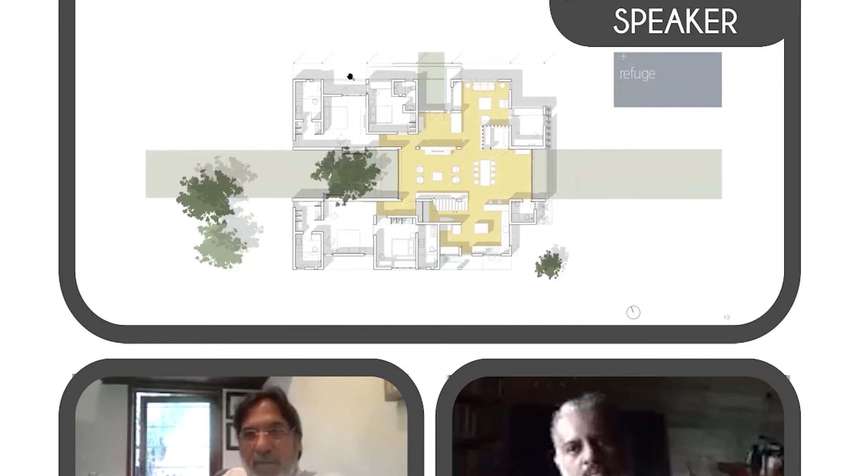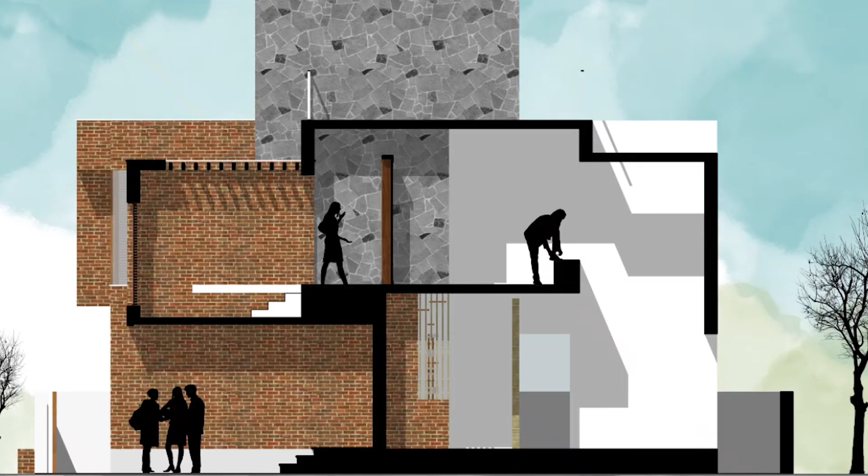Talented young designers and design studios working on design innovation with an approach that is relevant to our South Asian region have been invited to be a part of the platform. We also encourage design students from the region to share their work, be involved in the dialogue, and to be an active part of Design United.

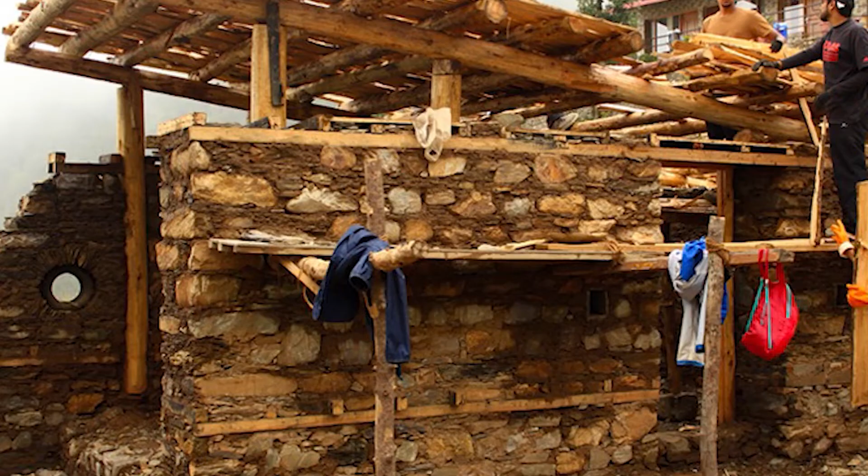Design United, most of all, believes in creating a community of designers and design knowledge that is largely contextual, with focus on contributing to the environment and our community. Design United believes greatly in a spirit of collaboration and idea exchange.

Welcome once again to Design United's 41st Design Conversation, a conversation with two talented design firms from the subcontinent, Malisha Koditavaku from Colombo, Sri Lanka, and Solachi Ramanathan and Ajay Dev from Urban Workshop, Chennai, India. I'm Varna Shashidhar, founder principal of a regional landscape practice, VSLA, based in Bengaluru.

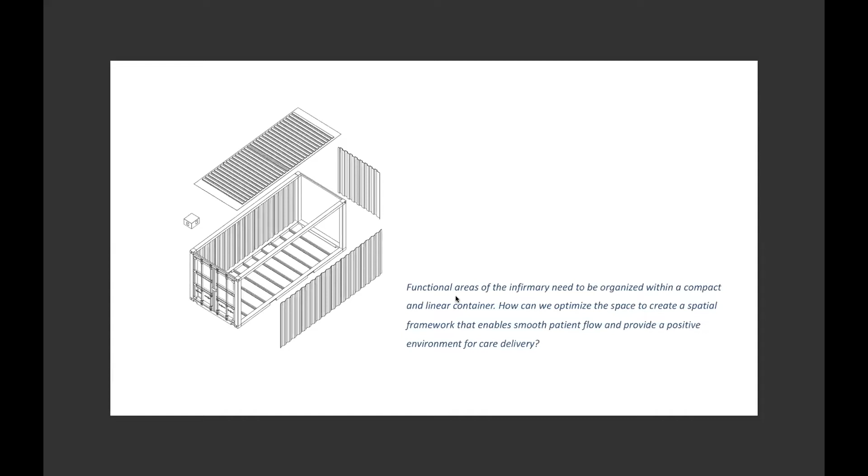So we stayed with the module size because it was easy to transport, and we looked at how we can organize the multiple functions within the proportion of that space. So we created this wall, a deep wall, which would manifest in the form of niches, openings, storage. And this was along the longer edge of the container, which contained the primary functions of diagnostics and treatment, a nurse station, and the monitoring of the patient.

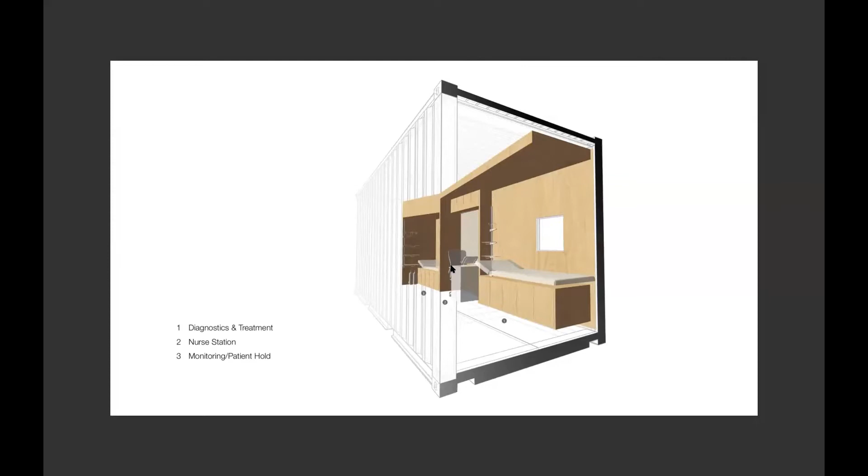And we decided to use wood, plywood, because it was a friendly material that one is more familiar with. And of course, the container being made of metal, thermal comfort was going to be an issue. So we provided a secondary roof to reduce the direct solar radiation, along with insulation along the walls.

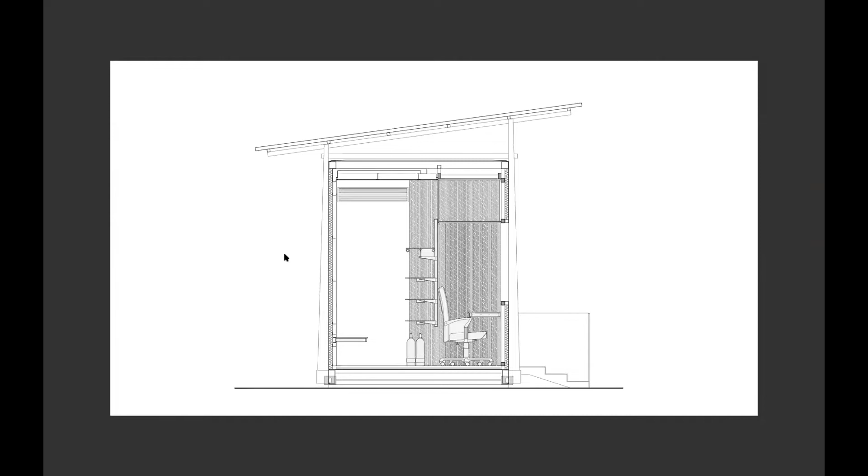And the plan basically consists of this wall on one side, and on the other long side, we have the waiting area and registration. So the central area is free for circulation. And the other elements like the ramp and staircase had to be installed on site.

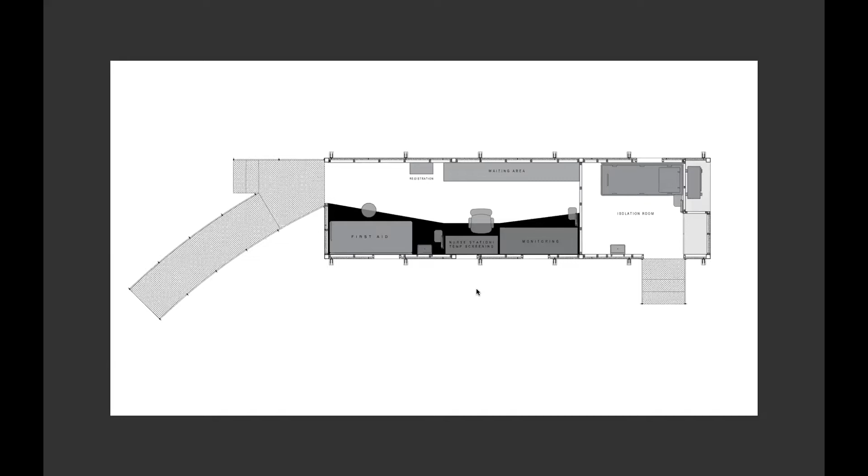So since we were not using a shipping container as it is, this opened up the possibility of rethinking the material expression, the external expression. So instead of using a trapezoidal sheet, we chose to use a flat galvanized sheet, and use the structure of the secondary roof as part of the expression of the container. So the container itself would be completely fabricated with the interior. The ramp would then be assembled on site.

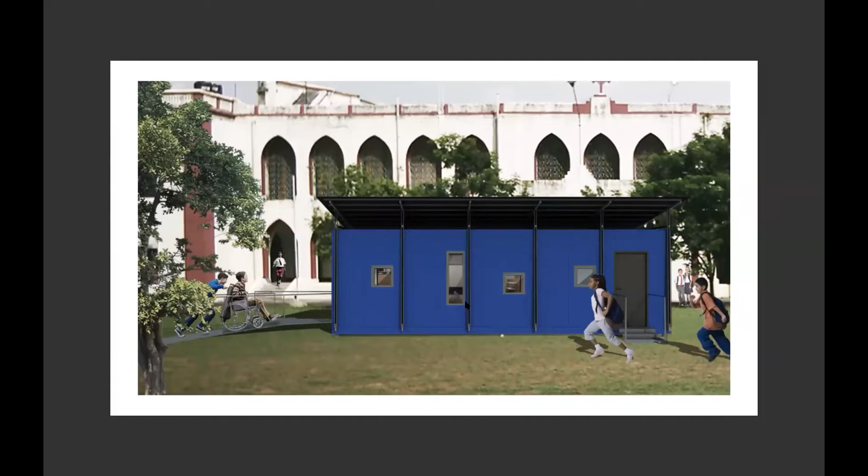So that brings us to the second project, which is a vacation home in Coonoor. When we went to the site, it's a valley view, and you can see Mettupalayam actually in one corner. We knew when we saw the site that we had to do very little with the building itself, and so we wanted the building to be harmonious with the context.

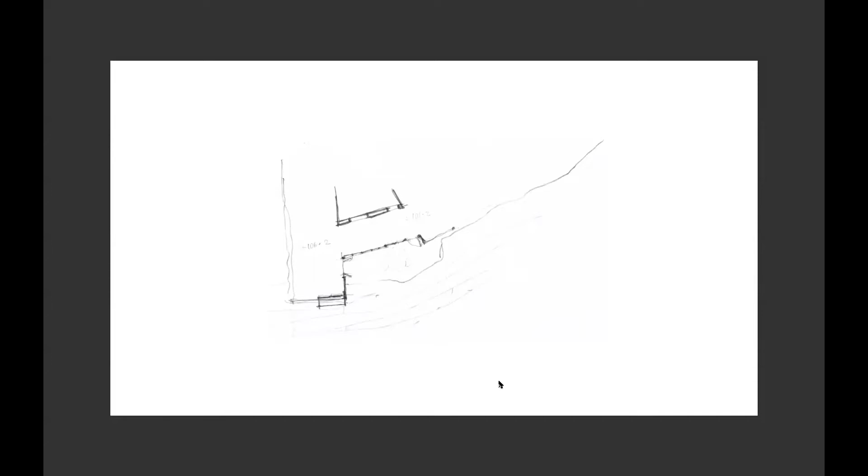So it consisted of two blocks, and the manner in which the two blocks were joined was inspired by the shape of the contour. So the building gently turns at angles, facing different parts of the view. And the facade of the building is open with the windows to the view opposite.

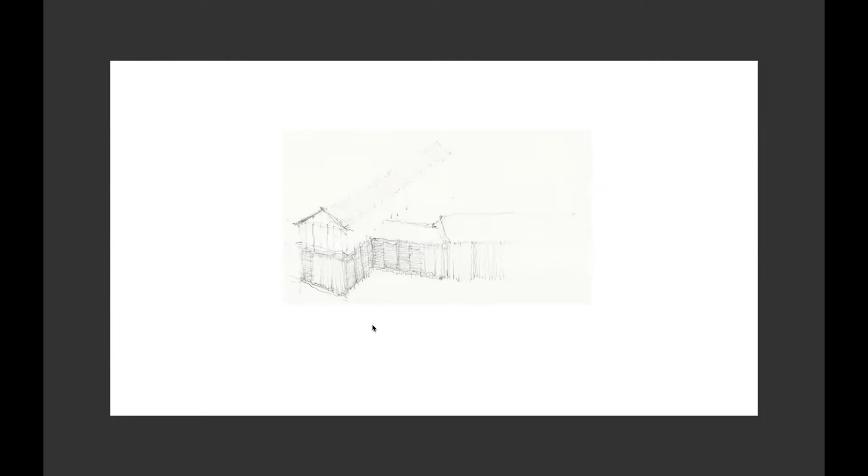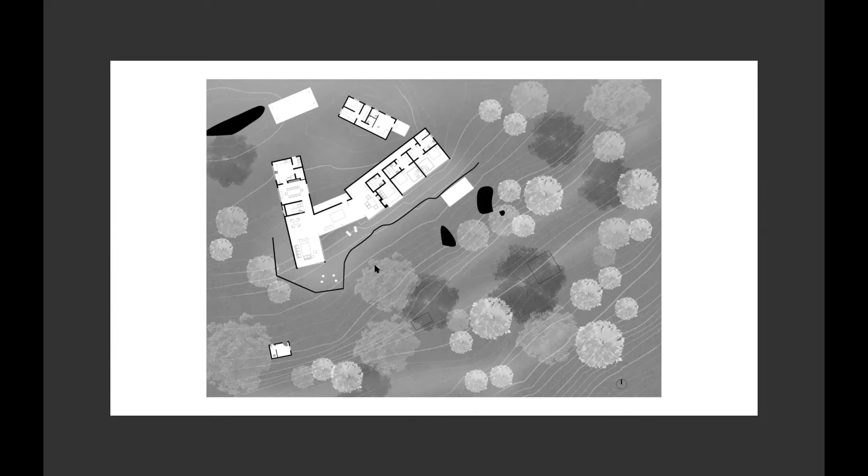So as a result of this geometry, the central space becomes the collective or common areas: the living, dining, the fireplace. And the bedrooms are at the ends of the circulation, on the ground floor and on the first floor. And this collective space has a very fluid, organic character. So you don't really feel like you're moving from one space to the other, but there's still some separation. These are some of the photographs.

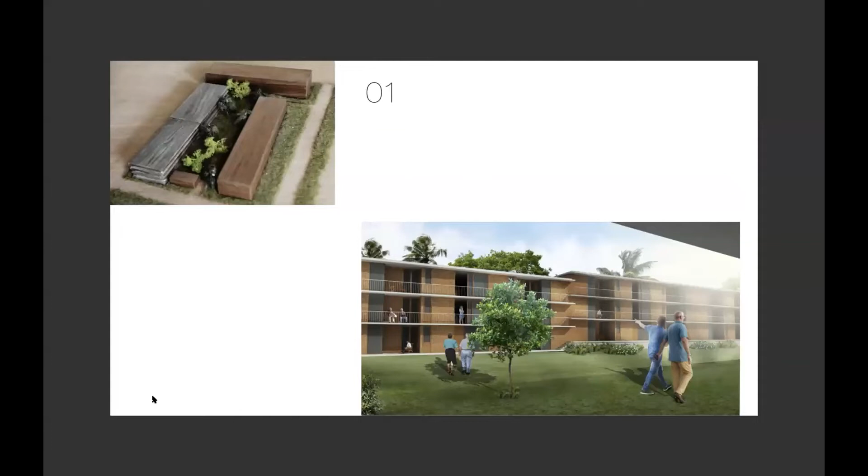The design process was quite long. We went through 3 schemes in an evolutionary manner, and we'll share a little bit about each scheme, because I think each scheme was very revealing, and the learnings were a lot. So the other requirement that they had was that it had to be 3 blocks, because they wanted to build 2 in the beginning, arranging the blocks with a big garden in the middle. It was fairly simple. So linear blocks with a garden in the middle. And the scale of the blocks was very important, so that there was sufficient light coming into the garden for plants to grow. So it had to be low, only about 3 floors high.

Now we could not take this scheme forward. The primary reason was that the 2 longer blocks were facing east and west, and that would mean that it would be pretty hot, especially outside of Chennai. And because of the scale, we were also not able to achieve the required area to be built.

So then we modified this a little bit, and we tried to bend the blocks a little bit so that they become self-shading in a way. Since the blocks now became larger, the passage in the middle became just a green corridor. So we wanted to provide more space for communal activity, for people to informally engage. So we created a large veranda in front of the apartments on every floor, a space where people could informally gather. And this again was an issue, because while we thought it was important for them to have this space, the clients felt it would be difficult to sell it. Ultimately, their personal space became smaller.

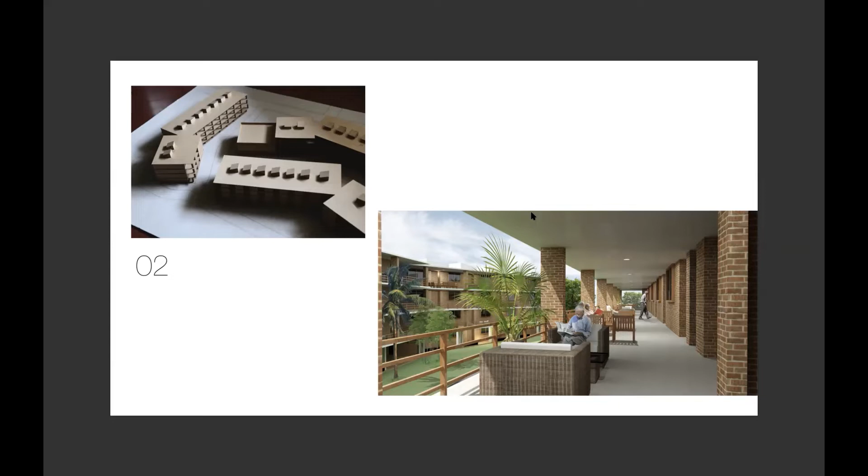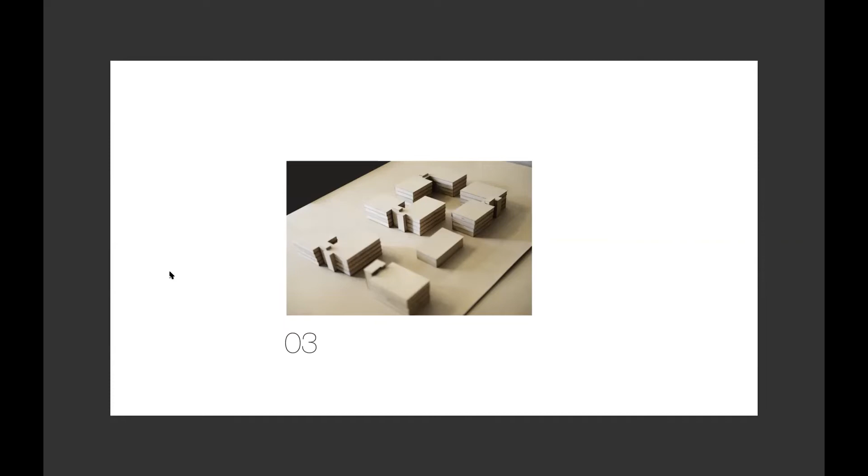So then finally we said, okay, we've tried everything with 3 blocks. Maybe we need to reconsider that. And then we decided to try a cluster option, where we had a larger number of blocks clustered around smaller courtyards. And so this led us to the final scheme, where we had 5 blocks to be built in 2 phases, more or less similar, with smaller garden spaces in between them.

And the unit itself, there were 1 and 2 bedroom units, and they were all organized around this covered balcony space. And there was a large common continuous balcony which connected all the rooms. And we thought that the housing did not require kitchens and it could be more open, but there again we were wrong. It seemed like what people desired was an apartment with a kitchen.

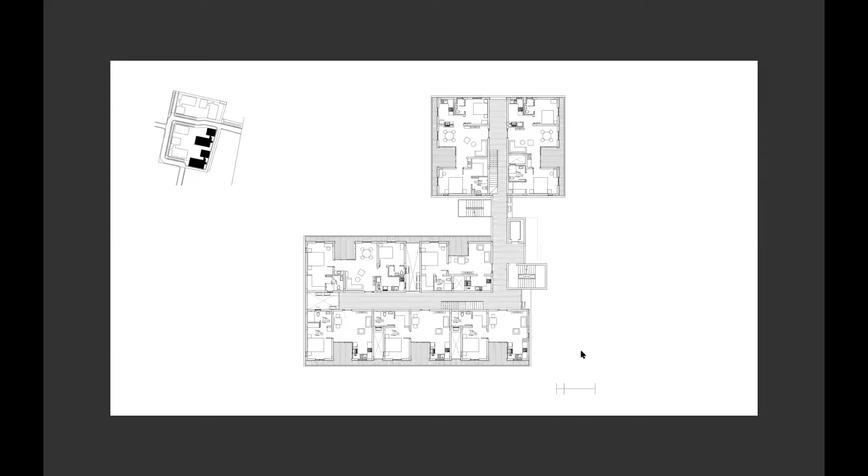In this scheme, we struggled quite a bit in the architectural expression, because it was a medium rise building, which was neither low rise nor high rise. So what we tried was to create a variation in the expression of the balconies. On the upper floor, continuous balconies which were open to sky, and then on the lower floors, wherever we created large plant.

The spaces in the common, the community center. Learning from this, I come back after my master's in housing and urbanism, and I've been exposed to many different typologies of housing, and many interesting ones. But I think the big learning from this was that it is very closely connected to the nature in which it is provided, who provides them, whether it's government or private, whether it's rented, for lease or for ownership.

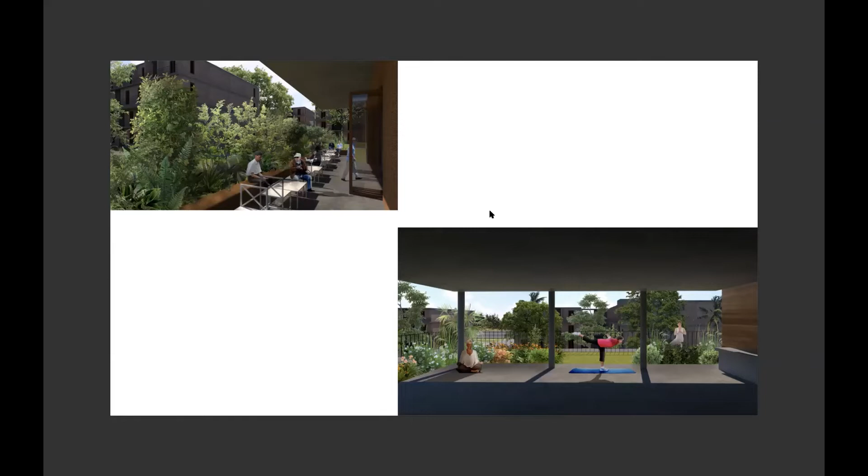So with that, we'll go to the last project. Yeah, Samudra. Scroll up when you need to. Scroll up.

Samudra is another residential project in Chennai ECR, which is in closer proximity to the coastline. The area is about an acre of land, and there was an existing building. The requirement from the client was to retain the existing trees and to allow more light and ventilation inside. So we made the plan with rooms in juxtaposition, without many corridors, and it's open towards the garden around. It has multiple entries, so you can step down to the garden from most of the places like the living room, master bedroom, dining, as well as the library.

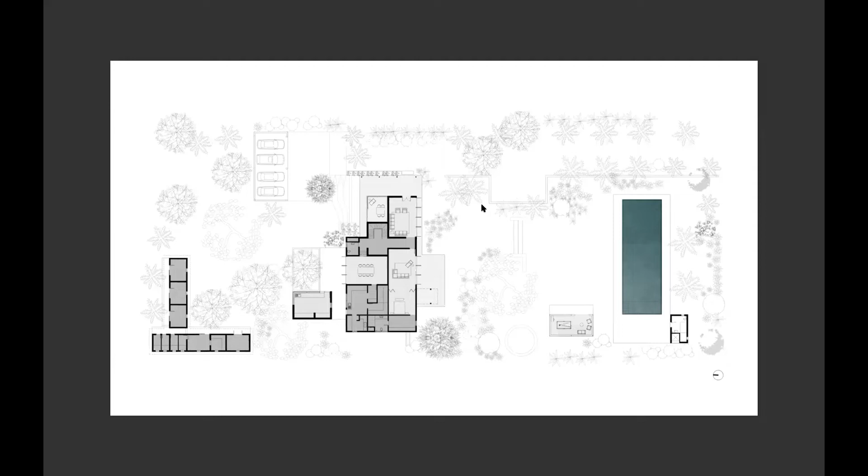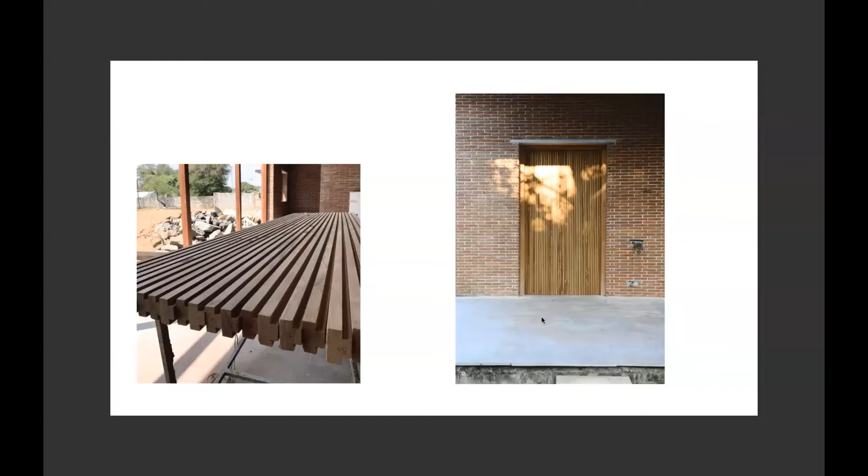The time we spent on the detailing was very helpful when we were at site executing the work. The amount of time spent at the desk on detailing really helps with the ease of execution. That brings us to the end of our presentation.

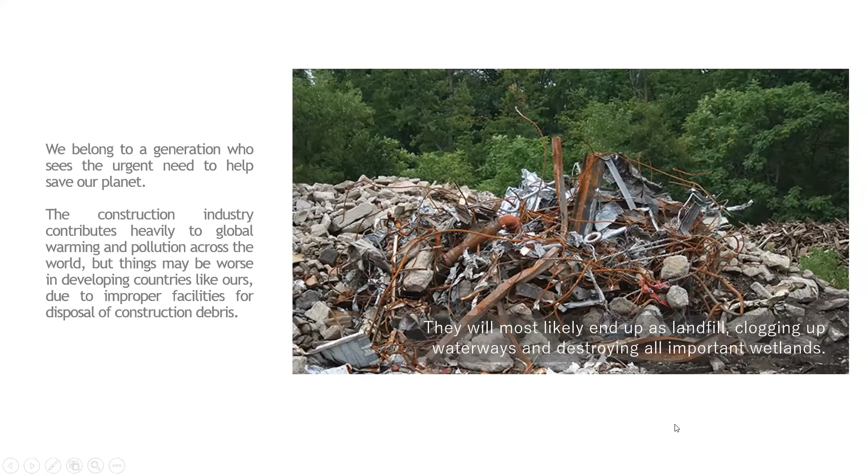So I think it's time that we look at recyclable materials and look at things that have been recycled or reused. It's not a new concept, but as the generation we belong to, we understand that there is an urgent need to think about these things. So what really is responsible design? As architects, we are also artists in a sense, but we have a lot more responsibility because it's a functional form of art, and we have a huge responsibility to the people who use our buildings, how they feel inside them, because our environments affect how we feel. It can make you happy or angry or depressed, so there's a lot of factors at play, and we have to really think about all of those things when we design.

So when you go beyond aesthetics, as designers there are certain questions we need to ask ourselves with every step of a project. Would this space induce happiness every day? Would somebody be able to seamlessly go about their day, or is my building going to obstruct their routine? Is it a maintenance nightmare? Where did this material come from, and what will happen to it at the end of its lifespan? A really important question: is this necessary in terms of space or materials? And can this be done more efficiently? These are questions I think we need to keep asking ourselves.

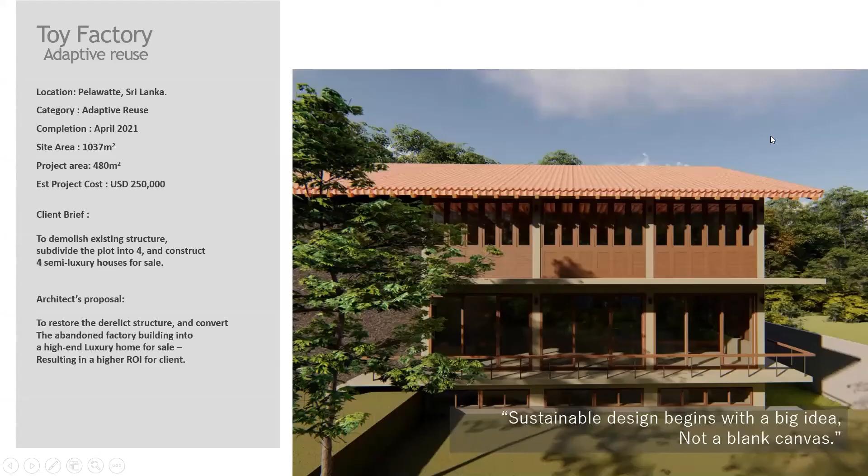I'll run you through two projects. I've been fortunate enough to have clients who've been very open to suggestion and to doing something slightly crazy, whereas not everyone would be willing to take a chance with their investment. So I'll run you through two projects as to how I approached design. The first one, this is the first time anyone's seeing this because it's still under construction, and it's going to be completed sometime next month. This is a 3D rendering of what it would end up looking like.

Basically the client came to me with a plot of land. It was 40 perches, or just over 1,000 square meters. There was a useless building on it, and he invested in it for land value. It was going to be divided into 4, and he came to me with the option of putting up 4 semi-luxury houses for sale. So it was entirely an investment project from his point of view. I gave him a counter proposal: what if we restore this building? Because I really didn't want to bring it down. It was a 5,000 square foot building. I didn't want it ending up in a marsh somewhere.

So I suggested, why don't we try and redo this and market it to a higher end, like a luxury home. And that actually resulted in a higher ROI for the client, because his investment was smaller and his return will be higher ultimately. It is a slightly bigger budget project, about $250,000 US. I'll run you through what we did. This was the state of the building. I think even the guy who sold the land didn't value it at anything because it was considered worthless. And it was in quite a bad state.

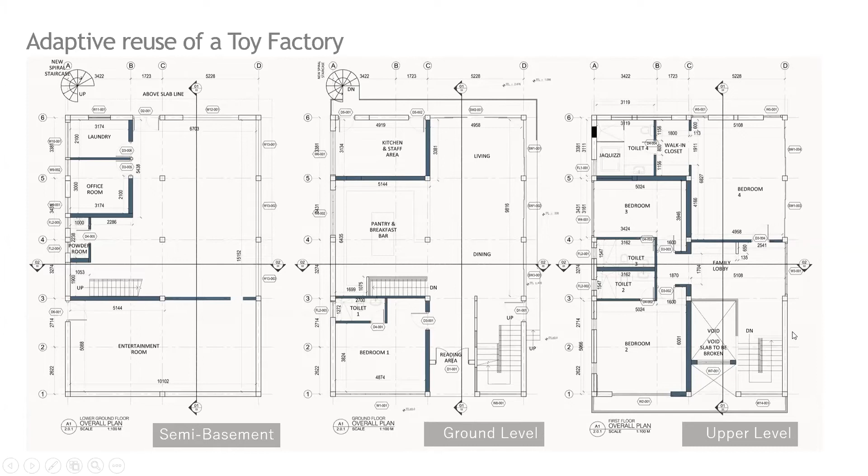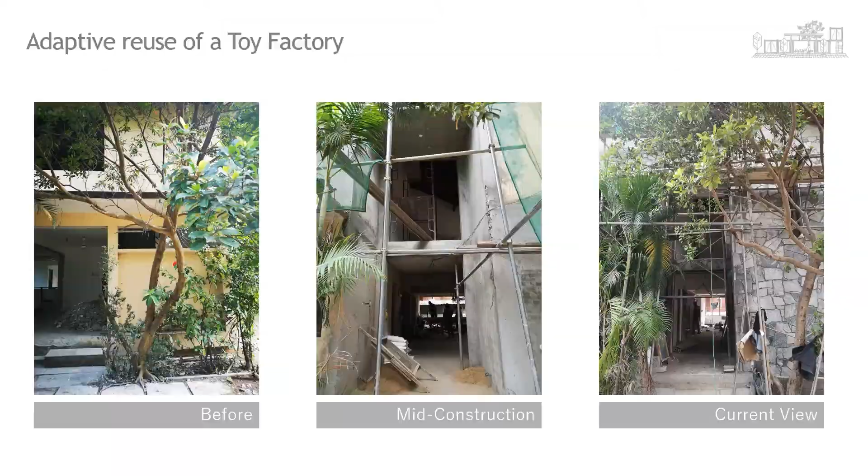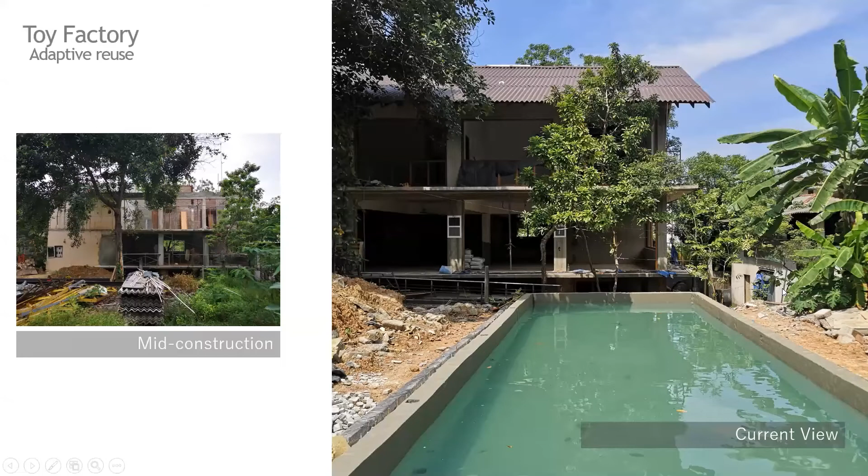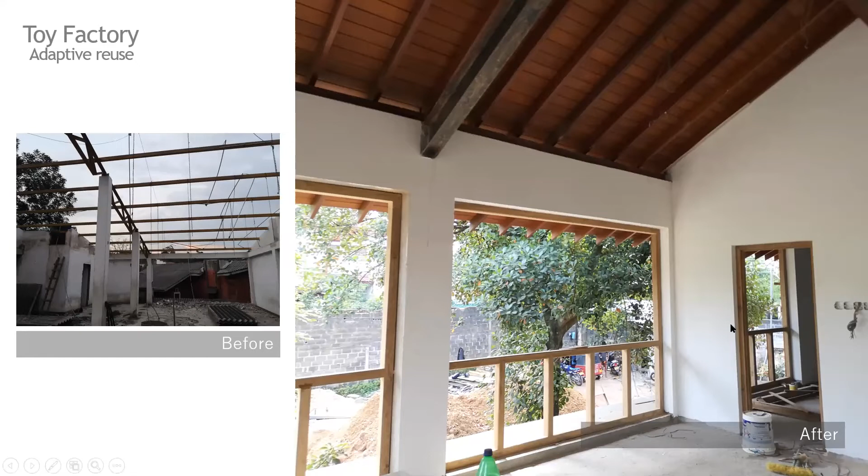I think the left photo is when we had taken the roof off. The roof was the only element that we had to completely replace because it wasn't suitable for a home. But we did reuse the steel that was on the roof. I think you see it here on the photo on the left. So all the steel purlins were restored and finished and reused for the garage, and we did an outdoor parking space, and they were reused for that.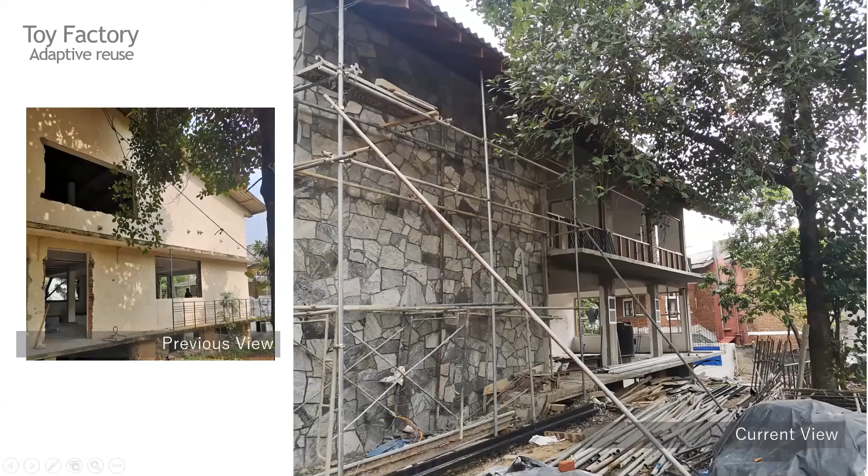So the roof was done afresh, but it looks much more like a home than the picture on the left, which again is the same space. So that's the same view that you're looking at. You see the same jack tree in the view. So the left would be the building when we had just started working on it, and as it is currently is the view on the right.

Yeah, so back to this, and this is what we're hoping for the end. The windows and doors are all done, and they're due to be fitted next week. So this would be the end look of the building, and we're hoping that it would make a great home, and that it didn't go to waste.

And the next one that I would like to present to you is the Box House, and that is a container conversion. It's a 5-bedroom villa, 5 bedrooms and 5 bathrooms, but it's only 230 square meters. That's about 2,500 square feet in total. The villa itself is only 2,080 square feet, and I think the biggest thing to learn from this was that by being restricted by the containers and the volumes themselves, we actually managed to fit a lot more into a little space.

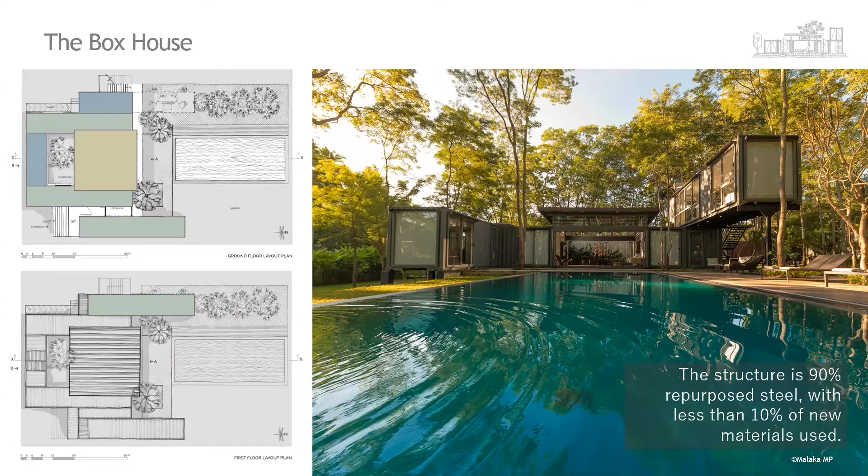So on the left, that's how the containers are configured. The space in the middle was fabricated. It's a space between the containers, and we roofed it separately to give it a different volume from the rest of the space. And the structure is almost entirely repurposed steel. So it's about 90% reused and only about 10% new materials, which was for the roof of that middle section. So that's what the inside of a shipping container looks like.

It's very basic, and I think Urban Workshop would also appreciate the amount of detailing that you have to do, and it's different to what we usually do. So it's a lot of detailing and learning on the go.

Unfortunately, with our project, it was so complex. The connections were so complex that we couldn't do a lot of fabrication at the factory, and we had to do a lot of it on site. So at this stage, we moved it to the site next. So as you can see, sometimes it doesn't always go to plan. Our crane broke and they dropped one of the containers while trying to place it.

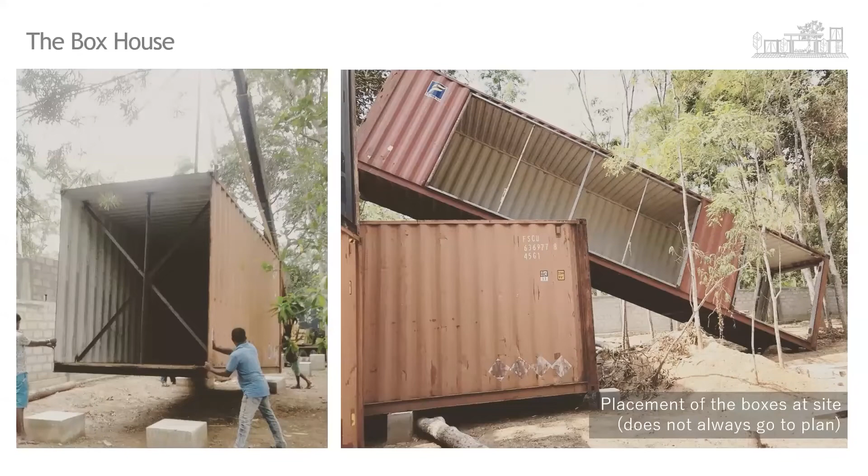It's a bit of a process because we had a lot of trees on site, and I was determined not to let any of them go. Unfortunately, I had to cut one tree, but I managed to save everything else. So this was the price we had to pay. We had to maneuver between trees and ended up breaking a crane and dropping a container. So that was once we had got everything kind of set up in place.

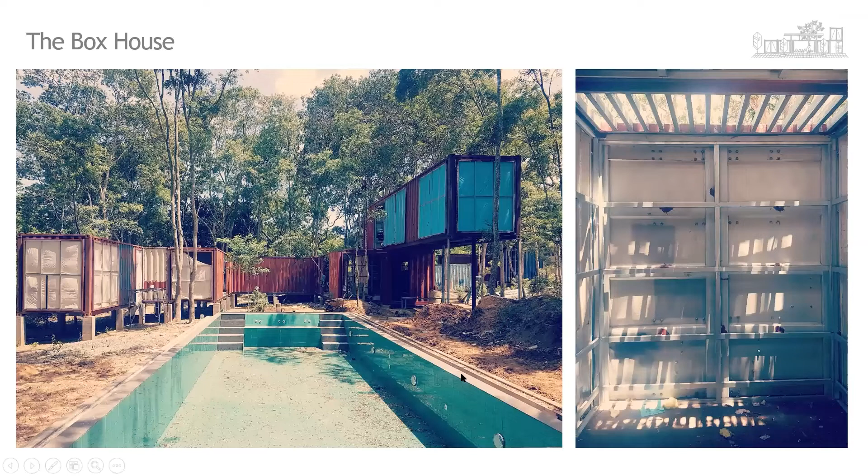So there you see a little more of the final form, and we did things like open to sky showers, and that's how we kind of did the fabrication before everything else was fitted in. So as you can see, there's a lot of panel work and a lot of board work on the inside, a lot of fabrication. So that tree stump that you see on the picture on the right was the tree that we had to lose, unfortunately.

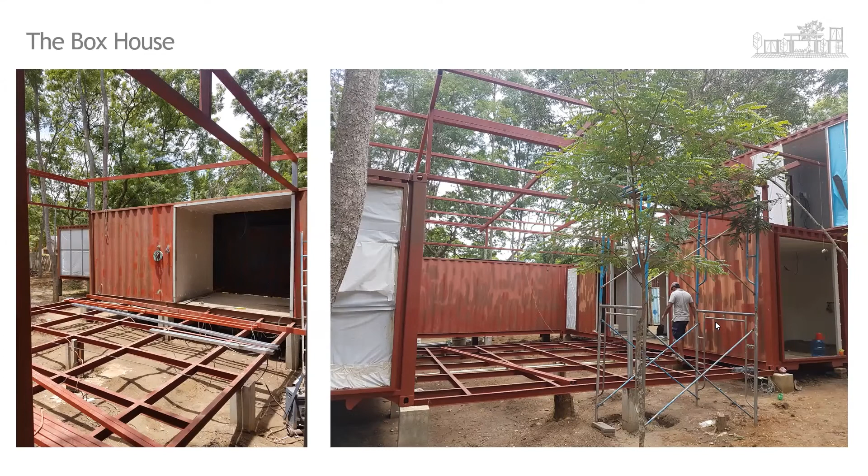But as you can see, the entire structure is above ground, and the ground under the site had a natural slope, and we didn't disturb it. So the rainwater, everything flows right under the house, and it doesn't disrupt anything. The whole house is kind of on stilts.

The picture on the left is the entrance stairs, and we found civil workers from the area. So this was in a village, it's not in Colombo, it's in the south of Sri Lanka, and we found local craftsmen and local landscapers and local people to do the civil work and the work around the container.

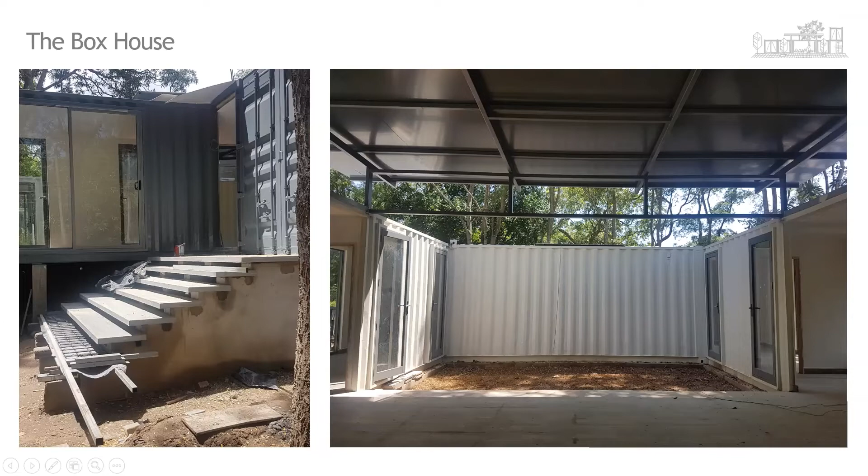And as you can see on the picture on the right, although it's an unconventional house, it was actually conceptualized around a very familiar concept to us Asians, which was the courtyard. And the rooms open into the courtyard with big windows that encourage cross ventilation. And the dining space is what you're looking out from, and it's completely open with the option of closing it up. So a few pictures of the completed project.

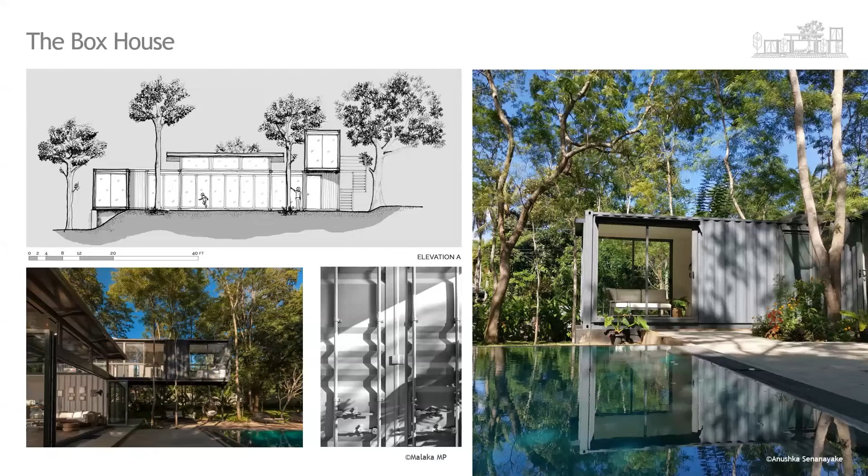So we were able to reuse 17.5 tons of steel of these containers, and we can recycle it again at the end of its lifespan, which I think is a great option. So you see the front elevation, that is the elevation that faces the garden. It's a 1 acre site, so there are beautiful trees that were already present on site. They're probably 100 years old at least. And the entire front elevation is glass to face the view.

So that's a few insights to the inside of the container. It really doesn't feel like a small metal box at all. And I think when you're confined to using smaller spaces or modular spaces, you make the maximum of it. And that's the elevated room upstairs and the open to sky showers. So the whole idea was to really blur the lines between the indoor and the outdoor spaces.

So this is one of the smaller rooms, and because of all the views, the green that you see on the right is into the courtyard, and on the left is the entrance area and off the back. So they don't really feel too compact or too claustrophobic. And this is the central space, which is the living and the dining combined. And you can get little peeks into all the bedrooms on the side. So that's a living and dining space.

And by raising the roof, I've also allowed for little bits of light to come in from between the container and the roof. So it has a different volume and different feel. And I'll just end my presentation with a little video, which sums up what the box house is.